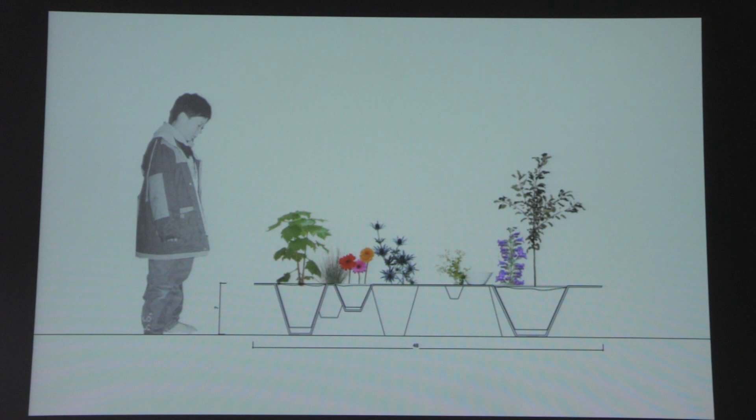So we simply added pots and we added a table. The combination was a garden table that you can put inside or outside. It's a customizable garden that shows the character of the owner, because you can put whatever plants you want in there, and the pots hold the table. This is our version, and this is another version. Let's see here.

What's actually interesting about that story is it was very odd. They liked it very much, but they made it out of steel. Even though we confirmed with them beforehand whether it could fit in the oven, they said no, but we think it's better in steel. So they made this table out of steel, and we all discovered that actually their main business is pots, and ceramic was neither here nor there - so this ended up being their first project made out of steel.

So we had another view of that. What we like here is that the plants and the table elements mix together.

The next project is a very different scale that we also started at the beginning. It's in Minneapolis, USA. We were asked, together with other architects, to redo all the public spaces of their headquarters. This is the main building. Here's the section - we were specifically asked to redo the first 2 floors of that main building, which is roughly about 4,000 square meters, also the garden in front of it, and a small meeting pavilion.

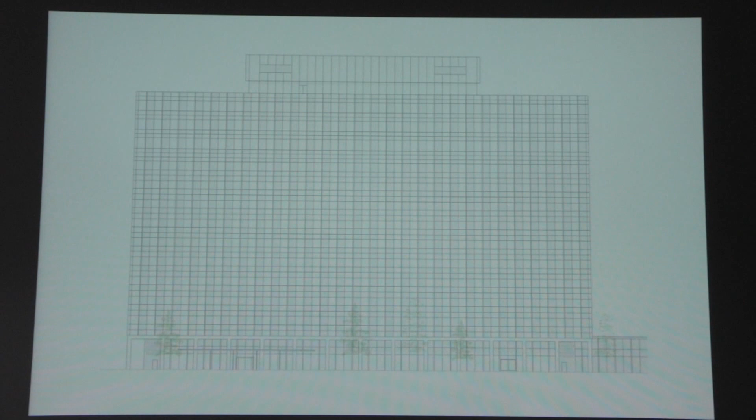So you see the plan - imagine the facade and the core as they are. We found this building to be a kind of mediocre Cartesian, Miesian version from the 60s, but it wasn't used that way because it was connected with skyways. You can see here in one corner and the other corner, and its position on the side. So they just didn't use it as you would normally use it - you would enter from the center, right? But they always entered and left the building from the corners.

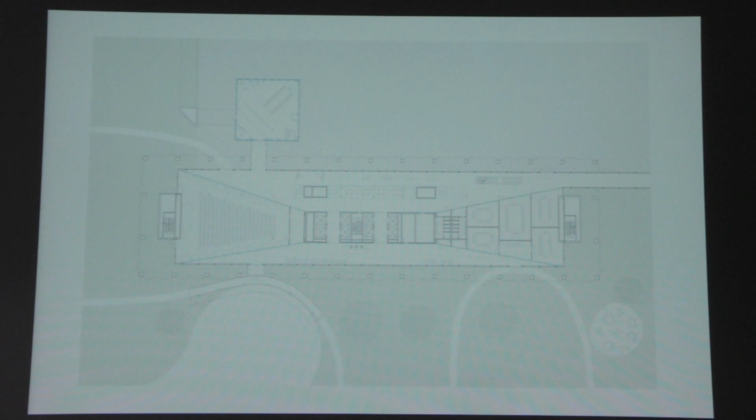That's why we simply aligned the circulation to what they already had, with those diagonal walls that connect the corners to the core, which divided the program into 4 parts: the lobby part to the south, then the 3M working spaces on the north, and meeting spaces and event space. You can see a model of that.

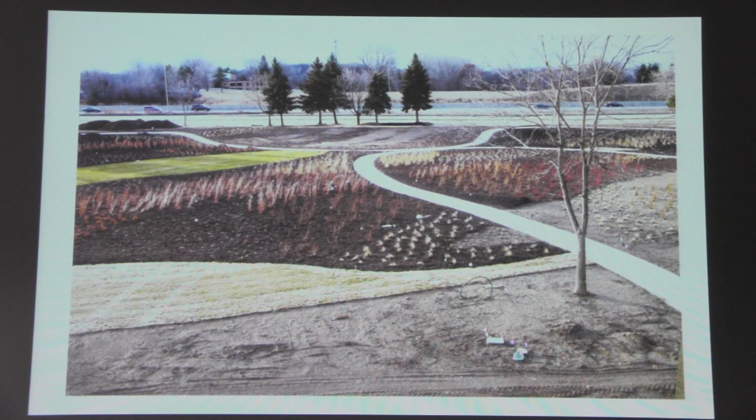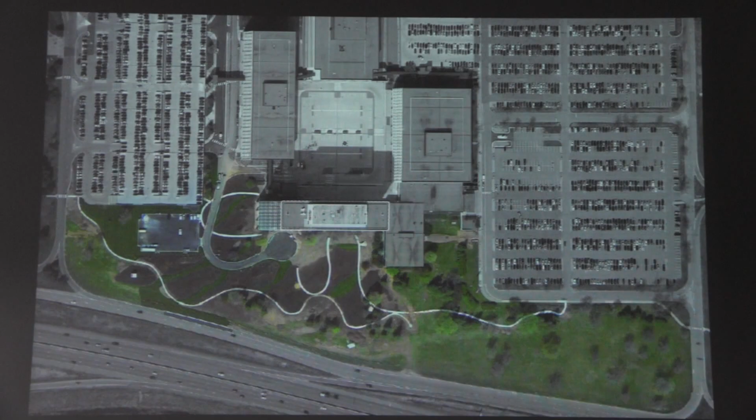This is the garden that we did in front - this is in the fall, I think by now the plants are much more in bloom. Another picture - this garden in the south created this new entranceway. That street you see, this bending thing, is new - before you went straight on. I think that lobby space is maybe one of our favorite spaces.

The other fun thing in this project was that we got to work with the company 3M - I don't know if you know them, but they make mostly materials that are never used in an architectural sense, like the stripes on the streets and little sandpapers for dentists and so on. We were allowed to use all those materials for free, which was actually good for the budget too, quite strangely, because normally you could never afford to put such things in the project. So we studied a lot what kind of material we could use.

So if you enter the lobby from this side, you have to imagine the green is also reflected, and you almost feel like being outside still.

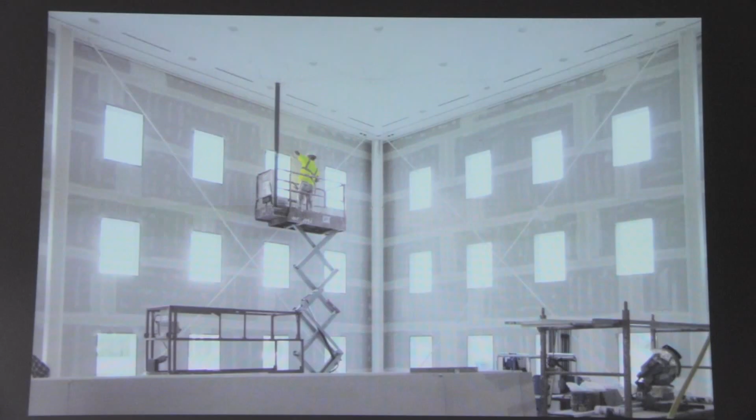So that's nearly done. And then we also added this meeting pavilion, as I said. You see it here in the middle of the picture. Since there are many different office spaces around, we created our own little office building. This is a construction image from inside.

This is a quite stupid story, because we proposed that location since it used to be an entrance structure, like a big concrete awning, in that place. So we thought, okay, we can just reuse it as a casual meeting space. But as the project went on, they added much more technology, more uses and so on.

So at the end, we were forced to entirely redo the space. And at that point, I think we all should have agreed to put it in another location, because the location was actually not so good. We just did it there because we thought it's useful to reuse the structure. But at that point, we just left it there. So several millions later, there was a thing that didn't really serve the program nor the function. That's what I mean a little bit - other things come into play, but at a certain stage you can't go back anymore, and then it's there and nobody knows anymore why. But we still like it.

So this is the project that Niklas was talking about, the bridge for Thomas Demand. This is his property outside of Berlin, and you see the stream behind the trees.

So the house is done by Caruso St. John, redone by Caruso St. John, and Thomas, at the beginning, several years ago, destroyed a certain part of the house, a big part, because he thought it's too big. And the house is under heritage, so he upset all the community already. So our bridge was kind of born into an already very sensitive, upset situation.

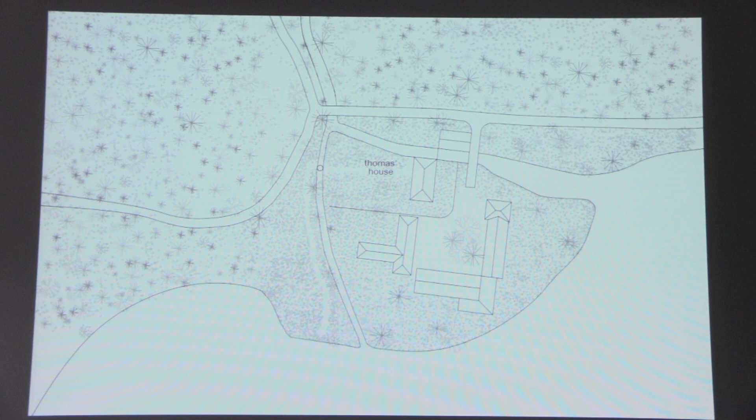So here you see the property, that's Thomas' house, and the lake on the other side, and the river dividing that property. That round thing is our bridge. So we came to the idea to make an inflatable bridge.

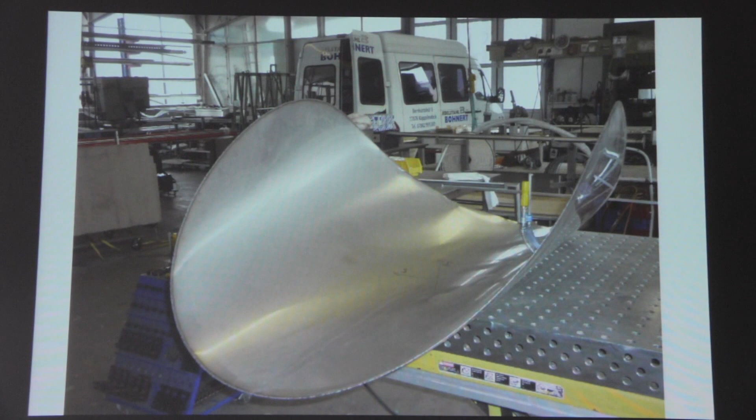That's just a small mock-up. The real thing will be 6 meters in diameter, so when it's rolled up it can fit in a truck. It's really only two steel discs, 3 millimeters thick, welded at the edge. When it arrives on site, it's pumped up with water pressure just to give it the shape. Then once it has its shape, the water is released, and it has structural qualities so that Thomas can hopefully cross it.

So this is another picture of a mock-up we did in our office, filling the thing with a hose, which didn't have exactly enough pressure, so we had to order a pump and so on. That trial kind of failed because the folds were too irregular, so it could break on one side. But that's how we imagine it - like a nice little island swimming in the river, very free, with no attachment.

But then very different characters, or more to say different species, came into play. Thomas felt kind of obliged, because he upset the community, to allow the water people to re-naturalize the river and install a fish bridge.

I don't know if you know what a fish bridge is - I didn't know that. But apparently it's something where the river is redone so the fish can swim upstream to connect the lake with the other rivers. Before they couldn't do that. And so the kind of very romantic stream there made place for a really highly engineered building, which wasn't clear to all of us.

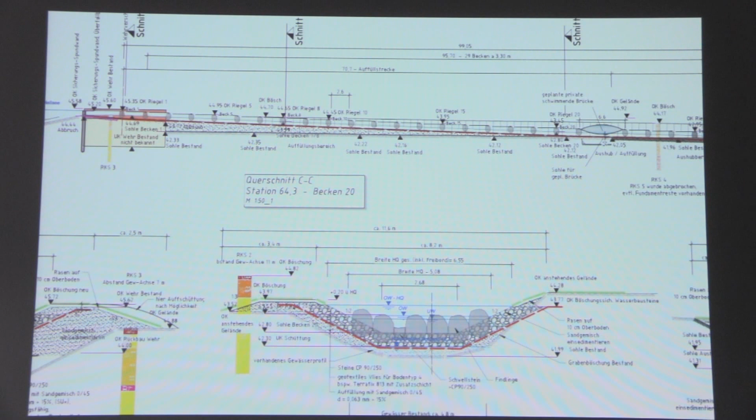So here it is. But then the big problem was that the fish people said you can't do that because it's not good for the fish - the fish will get afraid of your bridge. Imagine the fish swim all that way, come there almost to the end, super exhausted, and then they see that big shadow, get afraid, and have to swim all the way back.

So we said, okay, and it's really hard to argue, right? Because they are the voice speakers of the fishes, and the fishes can't speak for themselves. So we thought, okay, let's go to the highest fish experts, who actually sit here in Frankfurt, and they finally confirmed it's fine, the fishes are not afraid. Fishes are safe, so we can install. So the fishes are safe, you're just not sure if Thomas is safe if he crosses that bridge, but anyway, we won that fight.

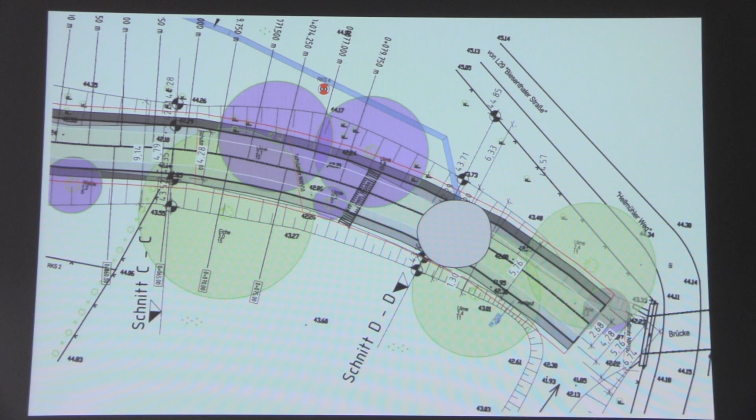So now the engineers built that pool, or that hole, for our bridge, which is really strange to us because that's exactly not the point we intended at the beginning. Thomas and I thought it really looks like a golf course, but anyway, maybe it's still great.

Okay, so the next project is one that is just starting. It's a country house for Georg Diez, a writer at the Spiegel. He came to our office with the desire to make a house for him and his friends. He didn't have a site, he didn't have a real program, he just had a notion of a community house where he wanted to be with his family, but also with his friends, or more than friends.

A country house is often a place you go to every weekend or every second weekend, and the rest of the time it's empty, and you arrive there, it's cold. So it's quite a nice idea to share that with other families. Together with him, we came to the conclusion it should be a house big enough for two families, but perceived and paid for by three, so that we can kind of deal with that. And that's the site we found together with him.

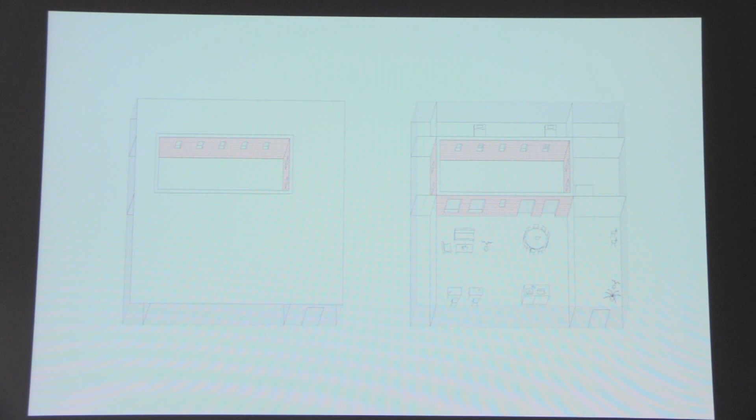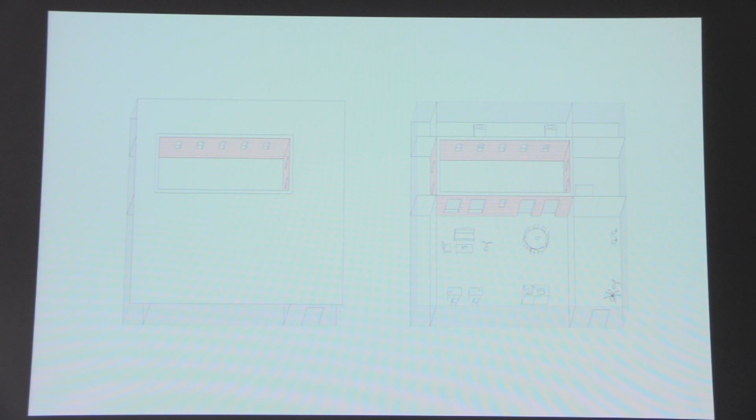So the first option is that we build a house around the existing barn. As you saw, there are two old barns on the site that are almost ruins. So one idea would be to just enclose that barn with a new house, so that what was before the outside wall of that house becomes now the inside walls of the new house. The rest is just an open space that you could close off with sliding doors or other doors. So on one hand it gives a new center to the house, but it also kind of divides the space in a way.

Just showing some pictures of that.

Then the next option—I think in every option we tried to find, okay, what's the theme really. One theme is, of course, the expansion of the families, right? So it has to be a house that can expand and contract in a way for different numbers of people, but also it should contract and expand with the seasons.

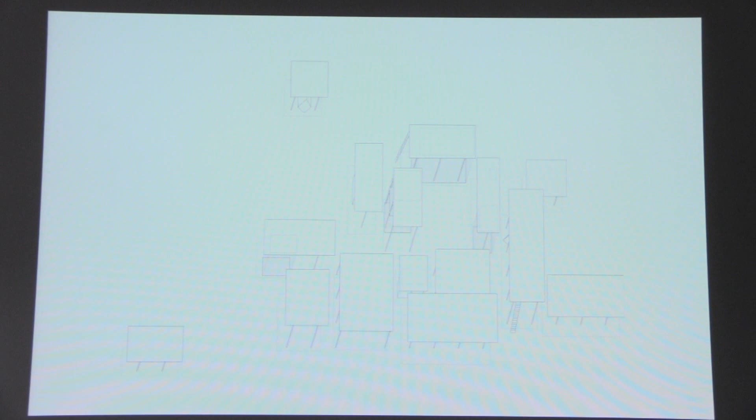So this idea is basically to make concrete roofs and bases spread around the site. At the core, the core house is really just under some of those roofs, meaning that the rest of the roofs stay open, but some of them we enclose with glass. So we give some kind of base, but the idea is that they can later decide, okay, maybe we enclose some of the other roofs with glass, or maybe just curtains, or maybe just camp under one roof. So there's a specific core that's always there for the winter, or if there's only one family, or if you're there alone.

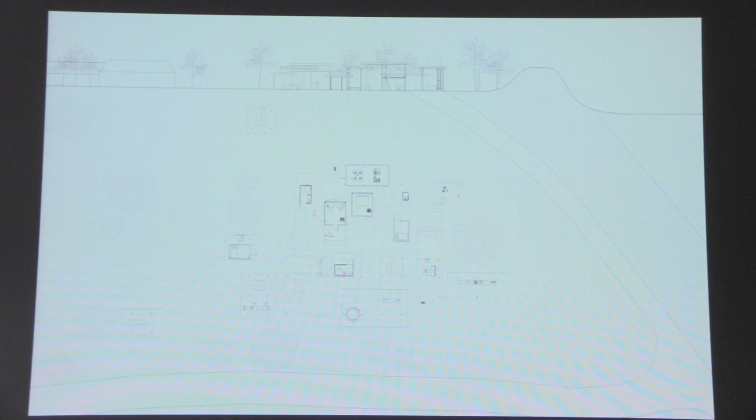But then it can really expand if, I don't know, the kids grow up—they can go to the far corner of the site and stay there alone. If they're small, they're with the parents, and so on. So it's a very flexible design.

Also, it could be staggered in, right? I mean, it could first be the roofs and then smaller, and then you could build more and so on.

So the next scheme is, again, we keep the old barns, but this time all of them. We take away the roofs and make them kind of secret gardens. And then we add some other volumes.

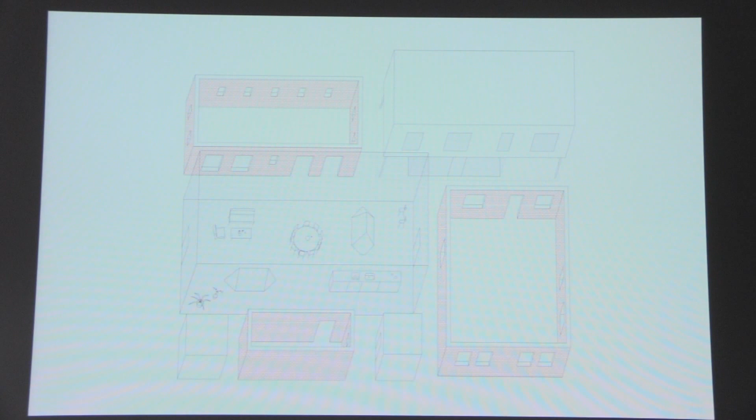So this is another option. Here, I don't know if you saw in the first picture, but there's this kind of dike. So really only if you go over that height do you have the view to Poland.

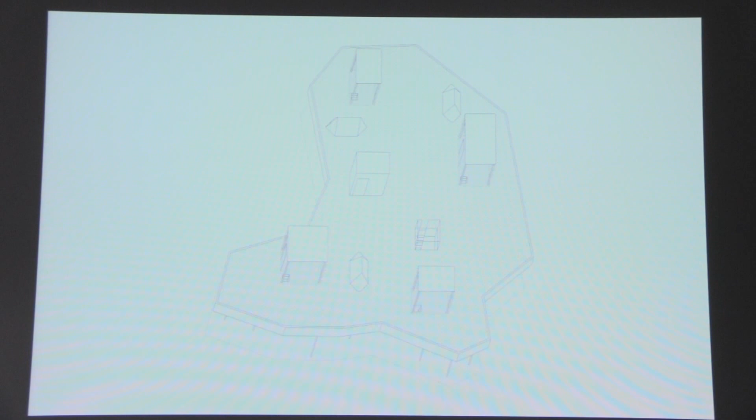So here we propose to make a lifted platform, a lifted roof. On top of that roof are all the private spaces, like the bedrooms, and underneath a bigger community space where the kitchen and living room are. So you kind of double it. The strange shape comes from just trying to double the ground - it shouldn't really have a shape, just a lifting platform. When you're on top, you have the view to Poland, and underneath you have access to the garden, surrounded by it.

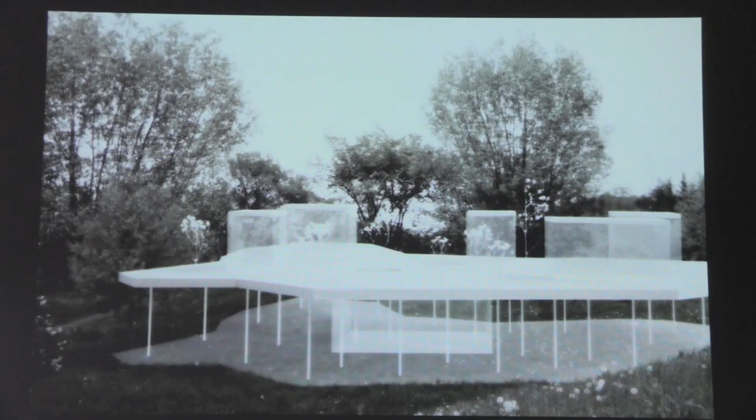Then we also thought about having little towers. Same thing we're interested in here - in a way, if you go up, you're very private, and you have the view. If you're down on the ground floor, you're connected with the others. So we're always a little interested in that relation of private and public, and how you share that space, and how you can use those structures in a different way.

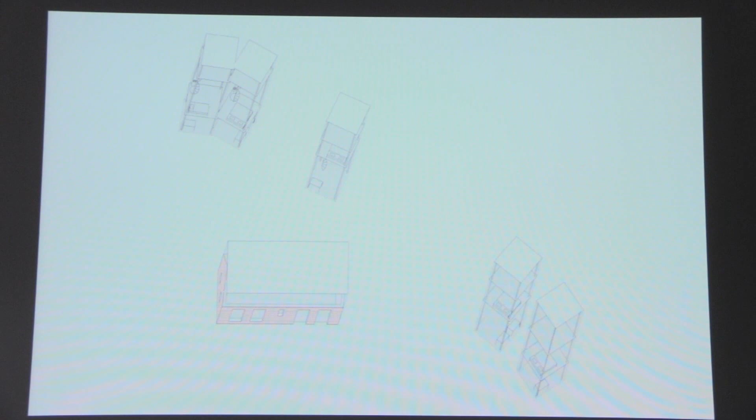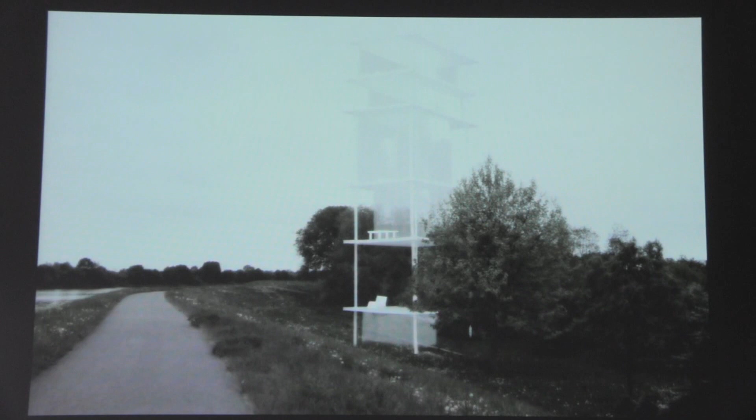I'm not sure if you would get permission for that, but this is another one - one big tower - similar to the project with the roofs. It's also the idea to make an open structure out of concrete and leave most of the spaces open. So at one terrace you could just camp, and others would just have a curtain. So just have a high structure to go high, to look over Poland. It's like a big house, but also very small at the same time.

Okay, so this is the last, maybe the most radical in that sense. This is a big vinyl tent covering the whole site, which really makes the ultimate - you don't know if you're outside or inside, because you really don't see the edges, you don't see where the outside starts.

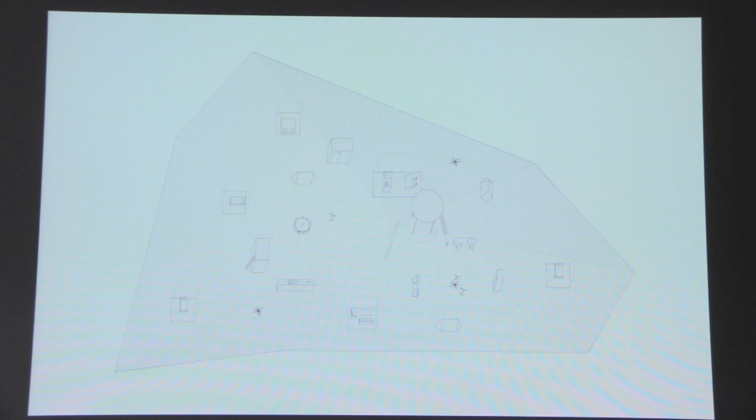And the idea is that in spring and autumn you could use that vinyl tent, and then in winter you would live only in those small boxes put inside here. So you contract, and then in summer you could open the tent and basically let the ventilation through. That would be my favorite, but we also don't know yet how we build that. So here it's really like trying to have almost no enclosure at all.

This site, and the extent - this odd shape comes from exactly the site lines.

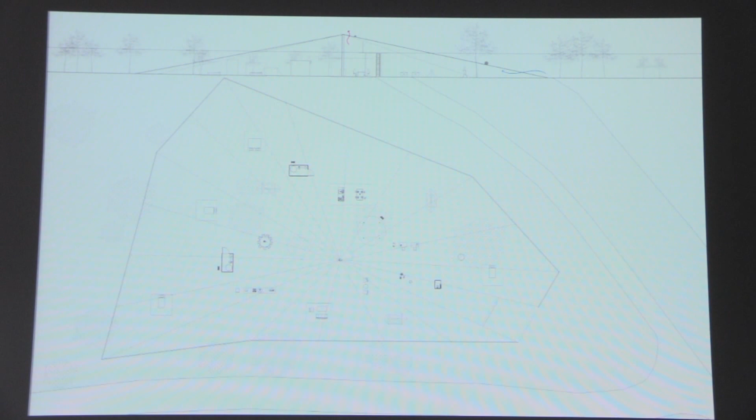This is maybe our favorite exhibition that we put up last year in Berlin at the DAZ, the Deutsches Architektur Zentrum, with Matthias Böttger. This was really special, mostly because it was a very nice collaboration with the Japanese artist Toshihiko Mitsuya, who we were put together with almost 3 years ago. It was kind of a forced marriage by some curator who brought us together for an exhibition that never happened. But we kept on working together and tried to find a place for our project.

So we looked at Toshi's work, and what we liked the most was that he worked a lot with aluminium foil. He made very different things, like little knights and other figurative pieces. But we really liked that material - as you can imagine, coming from SANAA, we like everything shiny. And so we started to experiment with that.

We came up with what we named structural studies. The aluminium foil was really only 0.2 millimeters thick, so very light - each of those structures you could lift with one hand, and if there was wind, you could almost feel they would fall apart. But at the same time, we experimented with what you can do with such a thin material so that it has structural qualities, and that's what we did.

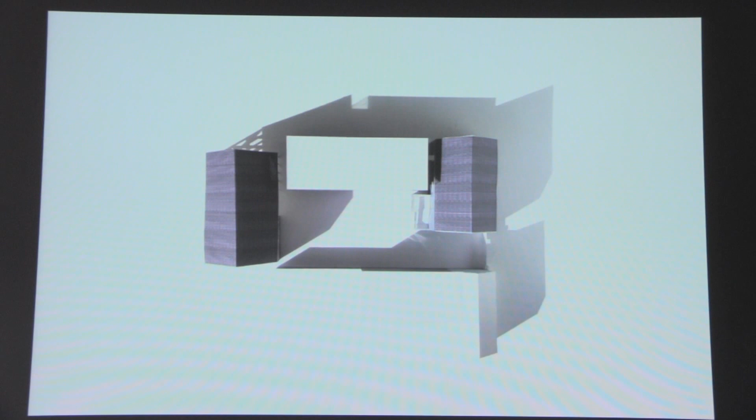So this was one of those typical places, and he came to us and said he wants to work there, so we should think about how we can implement a studio. We did that, and maybe this was the strongest move here: we decided to put the studio up on the second floor of that barn, bringing light in and lifting the ceiling height by only lifting up the gabled roof. So this would be the only really whitewashed space in the whole area, leaving the other areas as they are.

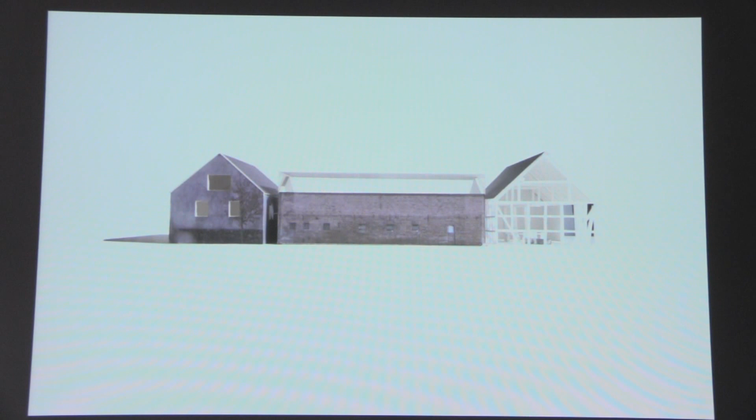So you can see another thing, a pleasant section of that. The other space we really didn't use, especially the barn in the back that you see here. At the beginning it was cladded with wood, and we proposed to remove that wood by lighting a fire—lighting it long enough that all the cladding burned, but we had to put it out at the right time so the structure still remained. Somehow through burning, it's maybe even getting stronger.

By that, we opened up that structure, so it's really like a patio with a roof. That way you could also see through the courtyard to the landscape, because on the other side there was the landscape, and before that was completely closed off. So we opened up that view and that unused space, making an outside patio where you could sit in the summer and eat and look into the landscape.

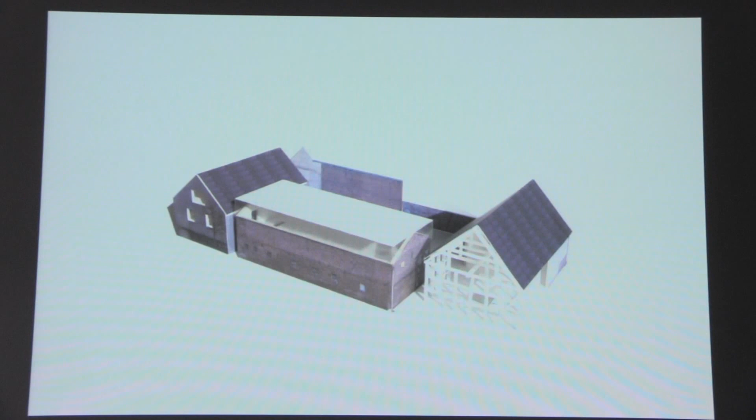That's a Photoshop rendering of the burnt structure. In a way, it was interesting here that he came to us saying we should implement an additional program, and he thought we should close off more things, but really it was more about taking things away, because there was too much space somehow.

So that's the next project. It's for the Denver Biennale of the Americas, which actually will start in a couple of weeks, so we have to go there in 3 weeks and install it.

We and three other offices were asked to make an urban intervention. The place we got assigned was 16th Street Mall—one of those outdoor malls, which I think exist often in America. It was a very difficult place to do anything, because it's so perfectly already resolved and done. It's a very successful place.

People go there—there are benches, flower pots, a telephone booth, trees, arranged almost with military precision along this artery. Buses go there every 5 minutes to take people places. There are many booming shops of all different sizes. So what do you do?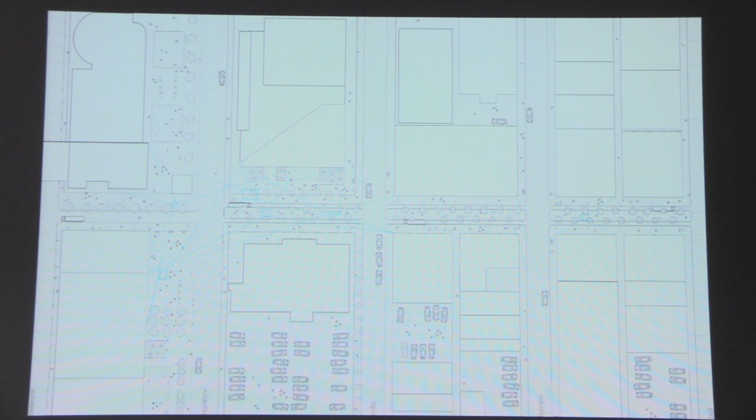Okay, so now I come to the project that Nikolaus mentioned. This is maybe the project that keeps us up at night the most at the moment. That's the building group project. I don't know if you know what building groups are, maybe?

No, not really? Okay, anyway, it's like a concept. I think it started in Freiburg, but it's very booming at the moment in Berlin, where people who want a house become their own investors. Normally if you want a house, you have to buy one, even a new house, from an investor that builds it and gives it to you. And this investor always has a certain margin.

So you always have to pay a higher price, and you can't really say how you want your house. So the concept is that a group of people get together and form a GbR, and they buy together a plot of land and become, together as a group, the clients for the architects. Which is nice in a way, because nobody earns money in between, and they also have a say in how they want their house.

As you can imagine, it's also a very complicated story to deal with so many people. Our building group now has 23 people, and they're all basically more or less our friends and acquaintances. So we didn't put up anything on the internet, which is good and bad. We hope we're still friends at the end of this project. But it really gets hard when everybody has to decide everything. That's a very hard process. On one hand we don't want to make it so formal, but on the other hand you really have to implement certain structures.

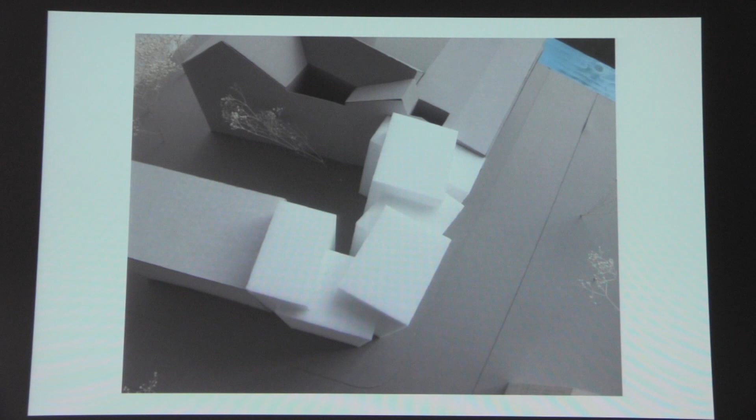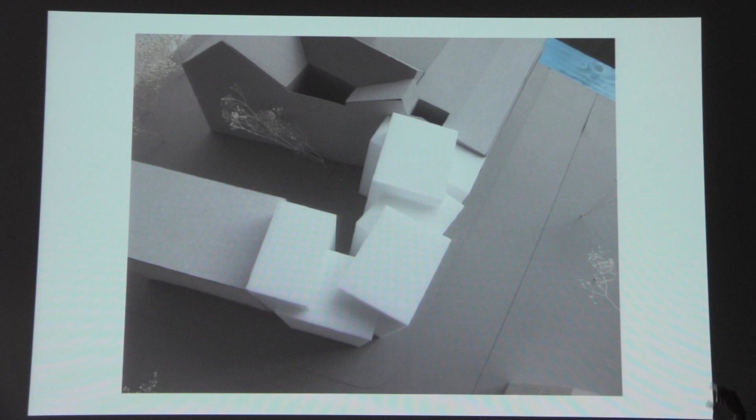So there are 6 towers that intersect vertically and horizontally. It's a little bit an old model, but basically they follow the 2 street directions, and since they intersect in both ways, we avoid those really strong horizontal and vertical lines. So it's not like normally where you have your little box and you're closed off from your neighbors - potentially the whole house could be open. The space is flowing through the whole house if there were no walls.

That way very high spaces and very low spaces come out. Everybody has a very high space, which is 5 meters. Then depending on size and spatial preferences, you have a certain number of those low spaces and the intersecting spaces.

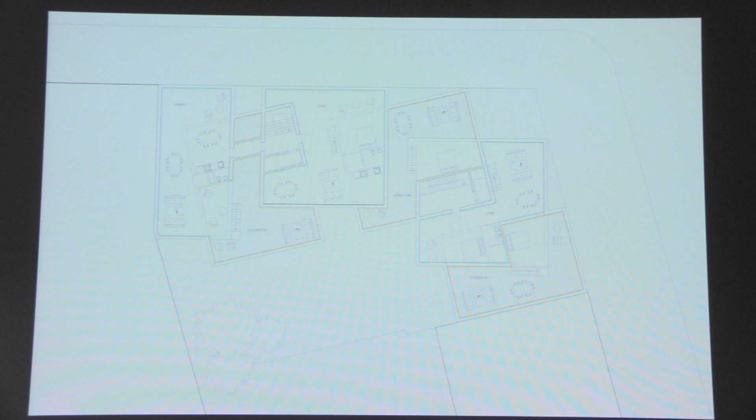On the next level, if you see that right flat - Cordelia has one little space on the upper level also, where she can sleep or work, whatever. So you intersect with the other apartments, but you can also have very complex spatial situations inside your flat. And if you want to close off those intersecting spaces, you can - that's really a later discussion, if you want to put glass there.

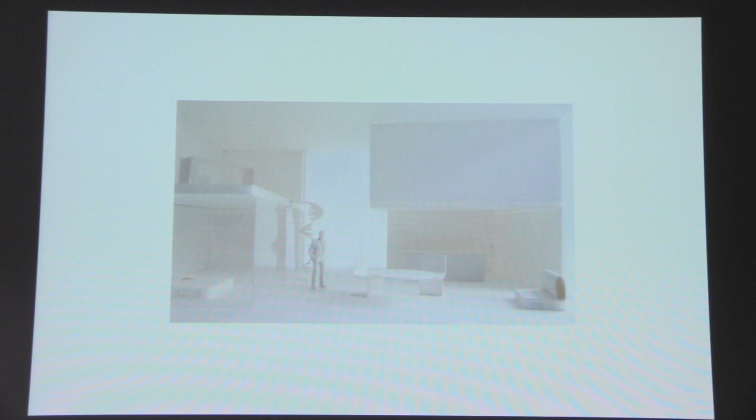So rather than me just talking with, say, Lars, we might suggest building a guest room together. Because I often have guests and you often have guests, so let's share that room between us, right? Or other things - other people might say, why not share our library or music collection, or build a sauna together because I'd really like to have one.

So those things can happen in the intersecting spaces, because that's where the apartments touch, right? So everybody has potentially 4 neighbors that he can speak to and think, like, maybe we just have an open space together, or sliding doors, or just a door.

So our goal is really that the whole house is open, and we're working on it. As you know, we still need to talk to them a lot, we need to propose that. But also the idea is that what you share isn't just a luxury or a plus, rather than an empty space where you don't know what to do.

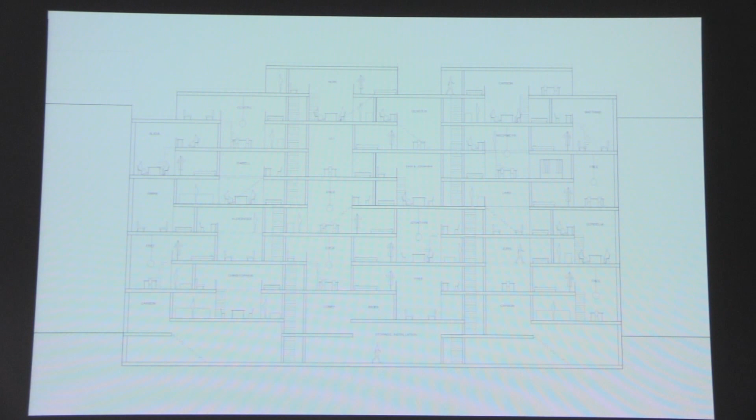So we hope if we convince the people, it can basically be a very open house where we really walk through diagonally the whole house, or at least can see through it, to somebody else's apartment.

But let's see how the people will do it. A few of them are really open to it, and a few others not, which is fine. So maybe it's not the whole house, but maybe we can create some kind of diagonals through.

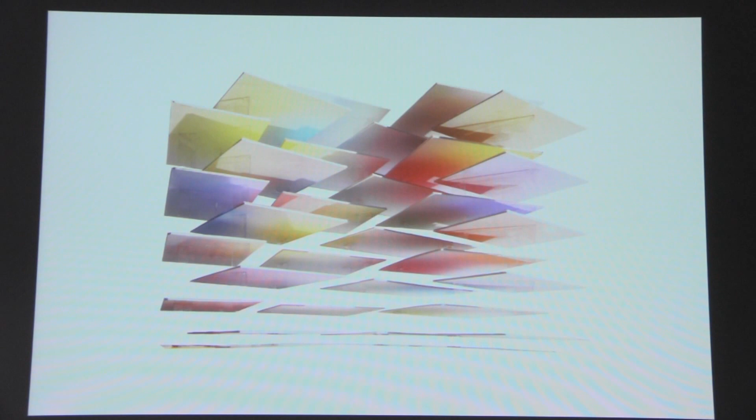So the next project is also a collaboration that we did with an artist. Her name was Lynne Marsh, she's a video artist from Canada. We were brought together by our friend Carson Chan, who ran Program Gallery in Berlin - that was actually the last show, so it doesn't exist anymore. He brought us together because Lynne already developed 2 films that she wanted to show, and they asked us if we could make the exhibition design for that.

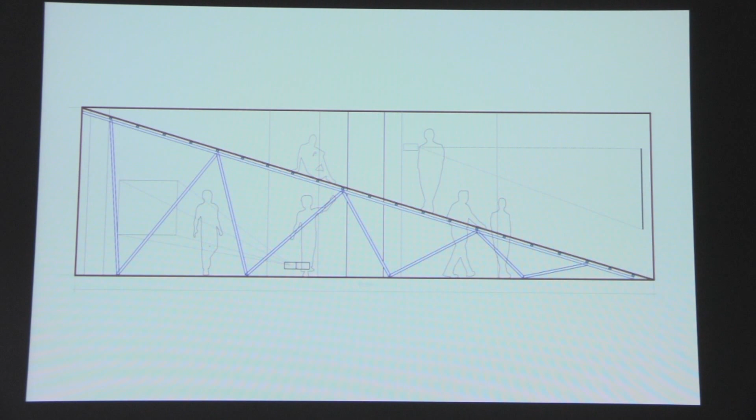So that's showing this upper space with the movie still, and people, yeah.

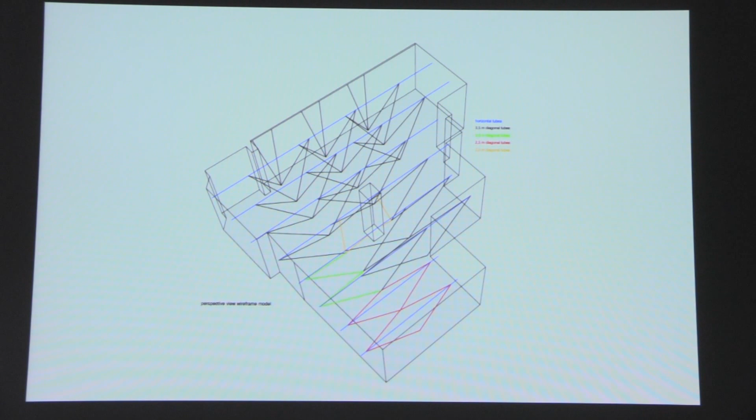So that's an image of just the structure. We actually put that up ourselves for a week. I mean, that was 2 years ago. I don't know if you would still do that, but it was a lot of fun and a lot of work.

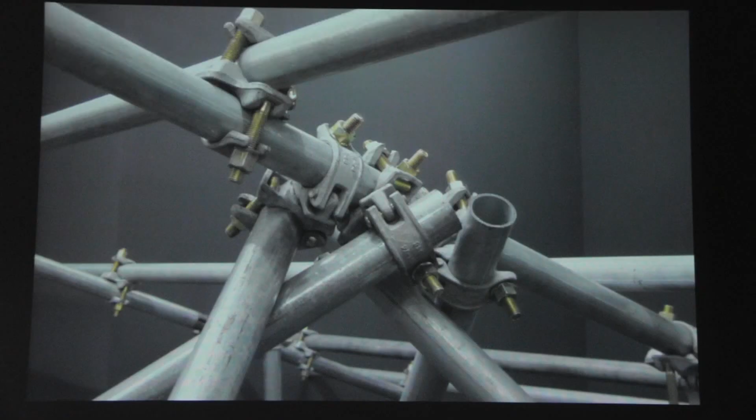Fitting there in there exactly. Sometimes very crazy knots arrived.

So in that sense, I think here we took her request, what she wanted, but also almost her concept of the movies very literally. So that's there, unlike many others that I showed, was no plot twist or something unexpected. So there was really a literal transformation. But what was still nice for us, is that we discovered things that we didn't know before.

I mean, for example, we did that 2.5 years ago, and we were really into, coming from SANAA, very light structures. But we discovered that kind of aesthetic of those that came often again after, which he didn't see maybe now, but that was the interesting point for us.